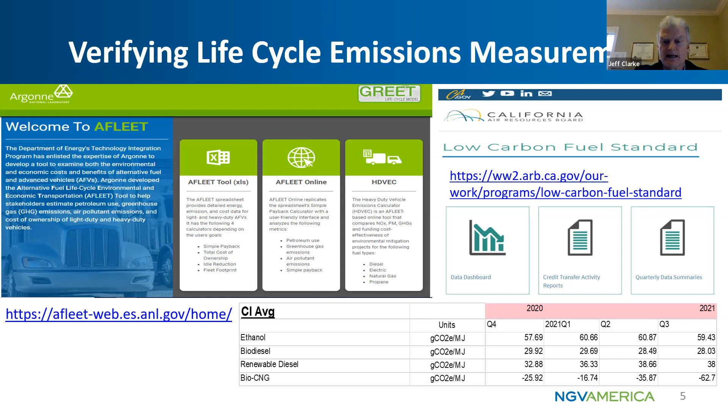Highly recommend these tools. We also point folks to the California website where you can see the carbon intensity scores of different alternative fuels. We're very proud that the bio-CNG number in the bottom right, most recent quarter data, shows it's -62. That's a negative number, so it's carbon negative. Natural gas, bio-CNG, has been carbon negative now for the last 4 quarters of the last year in California. That's quite an achievement.

How important is RNG to our industry? As you can see from this slide and the fact sheet we put in the chat, RNG accounted for 53% of all natural gas used in on-road transportation in 2020 - more than 50%, so that's a huge achievement. RNG, if you look back a few years ago, was just in its infancy in terms of being used in transportation, but it's grown by 267% in the last 5 years.

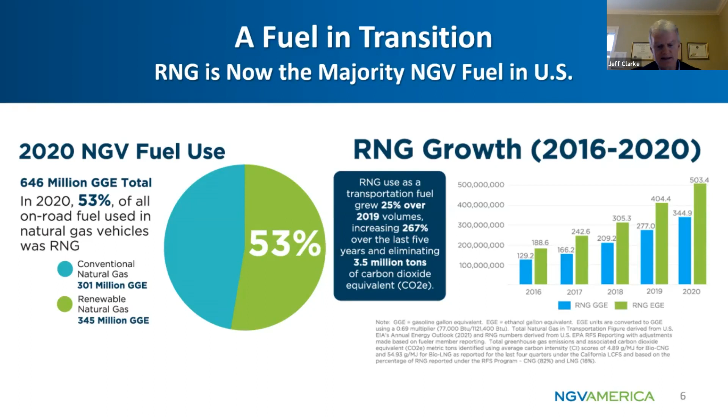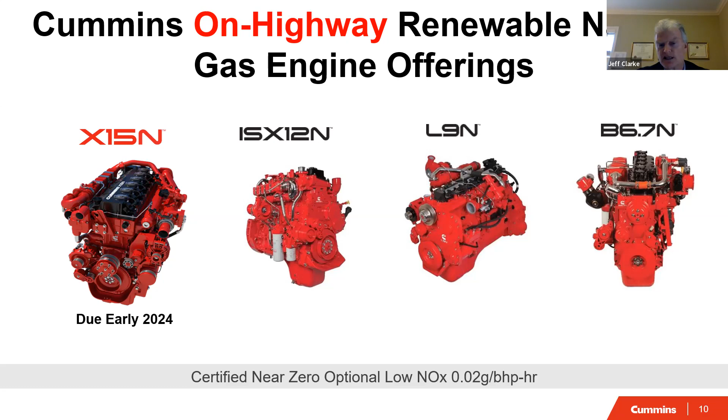What we have is a great solution for medium and heavy duty trucks. Cummins, if you look at their engine, they have a suite of products that can meet all the different applications for medium and heavy duty vehicles. All these engines are certified to the low NOx standard, which is 0.02. That is a standard the US EPA is currently considering adopting as the national standard, but right now it's voluntary, and not likely to go into effect until 2027. So we have product today that running with RNG is carbon neutral, and running with RNG can meet the most demanding NOx standard.

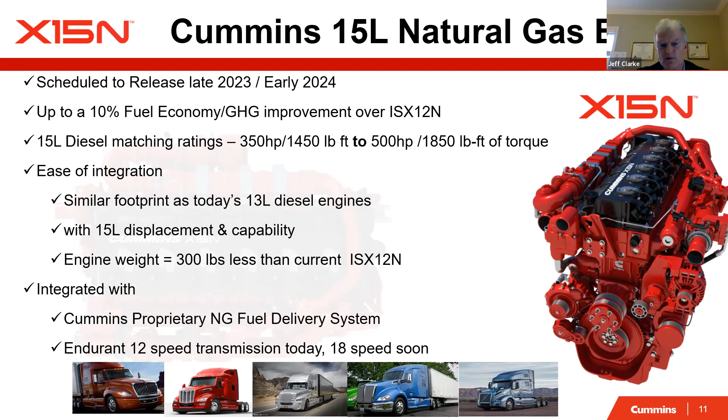Next slide, please. We have a new product coming out in the next couple of years. We're going to see the 15 liter. Why is that important? Because it means we're going to have a large enough engine to pull Class 8 trucks full of 80,000 pounds, operating in the most strenuous conditions. This is something our industry has indicated we need, and now it's coming. This product is going to be in demonstration soon with fleets, and Cummins is saying they're going to have a 10% fuel economy improvement with this engine. So we're very excited about that.

Next slide, please. The benefit of natural gas in transportation is that our engines are able to meet the strenuous emission standard with very simple after treatment control technology, much like what we use in our light duty three-way catalyst. So we do not use SCR systems, so we have no regen downtime. This is essentially a maintenance-free system, no filters to clean or replace, and no DEF fluid.

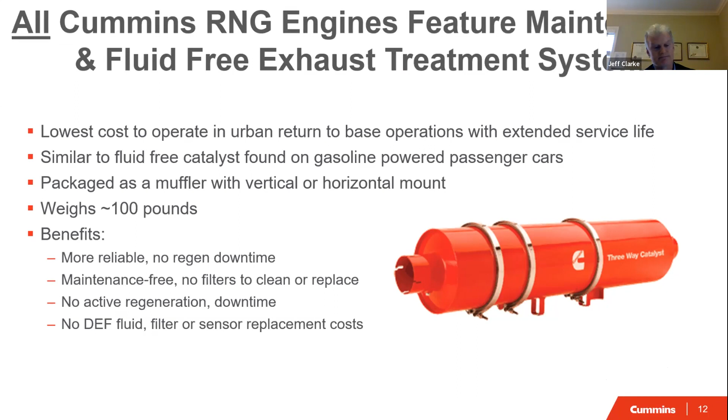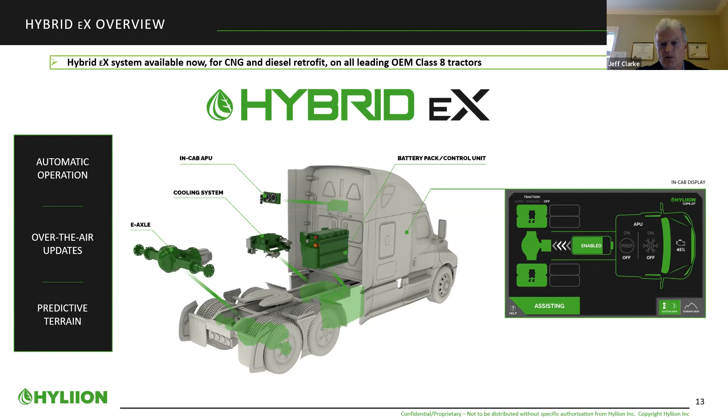Next slide, please. Another great development is the advent of hybrid trucks. This is a product available today in the marketplace as a retrofit. You can take an existing truck and retrofit it with a hybrid system that can run with natural gas and batteries.

Next slide, please. And this is another product available from Hyliion, their Hypertruck ERX, which is coming out soon. This product actually operates as a genset with the natural gas engine providing electricity, and then electricity powering the vehicle. It has an all electric drive capability of 75 miles, which is important in urban areas, port facilities, and other places where you'll want zero tailpipe emissions. It has a 1,000-mile driving range.

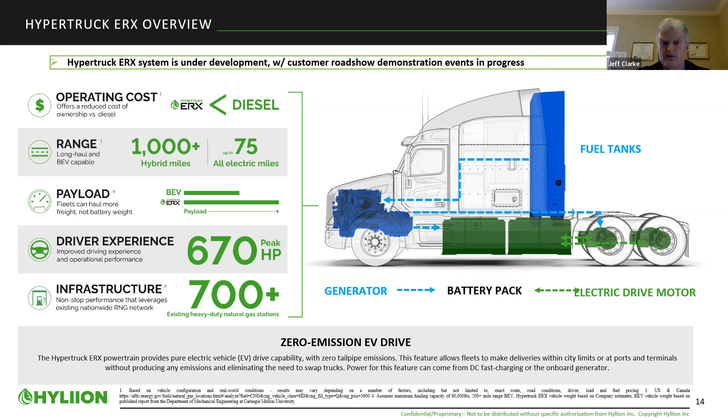Next slide, please. So in wrapping up, I think the takeaways here are that with natural gas and RNG, we have a solution that's available today. It's deployable, it's scalable. We have fuel that's carbon negative, as we pointed out with the Bio-CNG in California. All of our products meet the low NOx standard, and we have trucks that can go 500 miles, 800 miles. So we have a solution that fits a number of different important applications. Thank you very much for your time.

A lot of great information, Jeff. I got a number of questions, but we'll hold our questions to the end. A lot of great information. I hope that people are paying attention and taking notes. Great information. Next, we'll go to Marianne, who is well-versed, with over 100 articles in this space. So thank you, Marianne. Hi, thank you, Antoine. I'm going to turn off my video so that I don't have any bandwidth issues. Okay. Kimberly?

Great. Okay, so we're going to focus today on heavy-duty vehicles, though RNG can be used elsewhere. The focus, as Jeff already keyed us up, is on heavy-duty vehicles. Next slide, please.

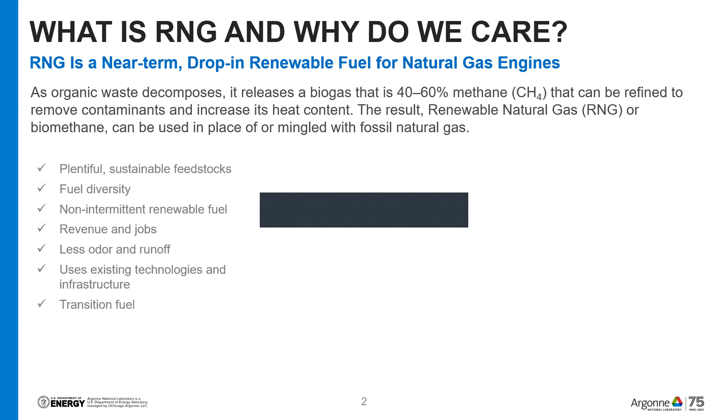Next, please. And as Jeff said, there are a number of benefits, from the fact that it's from renewable feedstocks, it's diverse, it's not intermittent like solar and many other renewable fuels. Economic benefits, it's a transition fuel, and most importantly, next please, it cuts greenhouse gas emissions, and I'm going to really focus more on that particular aspect. Next, please.

This image comes from a document we've recently released, and I'll put the link in the chat in a couple of minutes. It compares various fuels on a well-to-wheel basis, using the carbon intensity measure that California uses, which is grams of CO2 equivalent per megajoule, including both the production and use of the vehicle.

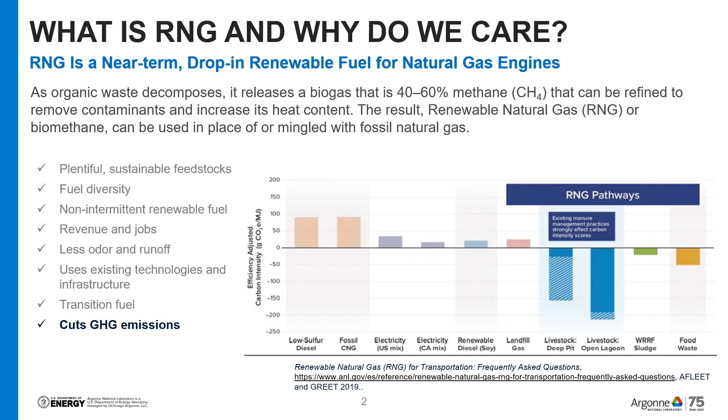These numbers came from the GREET model for generic pathways for each fuel type in a heavy-duty diesel engine, using the AFLEET model to model fuel use on the road. These are generic pathways, not exactly the same as what you'll see from folks in California, where they're reporting actual values obtained from a particular project that produced renewable natural gas for 6 months. Those numbers are specific to a particular project, whereas these are generic.

Walking you through it: low sulfur diesel and fossil CNG, when we adjust for engine efficiency and calculate carbon intensity, are basically equivalent. Electricity is less for the US mix and even less for the California mix. I'm working across from left to right. Renewable diesel from soy is comparable to electricity in California, as is landfill gas. Those are much better than fossil natural gas or low sulfur diesel.

When you move to the right and get into some of these other RNG pathways, that's where you see negative values, particularly for manure-based pathways, where the RNG is produced from animal waste. It could be dairy farms, pig farms, chicken farms, or cattle confined animal feeding operations. It also depends on how the waste was handled in the past, which is why we're showing a range. Those blue lines can be anywhere from well over minus 200 in carbon intensity to just slightly negative.

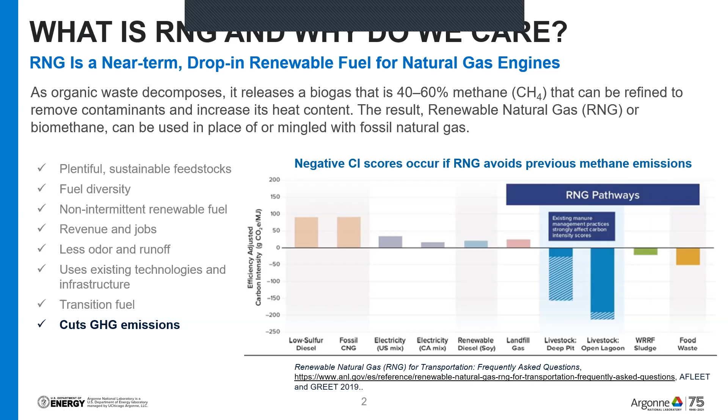Jeff alluded to the fact that we've been monitoring projects that produce renewable natural gas only for transportation. We've been conducting this survey over the last 5 years, starting in 2017, then 2019, 2020, and we've just completed the 2021 update.

These numbers are not yet posted online. I'm hoping they'll be up in the next week or so. Over those 5 years, we've gone from 112 total projects, operational, under construction, or planned, to over 400. That number is a little higher than what Jeff indicated a few minutes ago, because it goes a little further along, through the end of 2021.

That's 418 total projects. For the ones that are operational, they have a potential production of over 600 million gasoline gallon equivalents. That's bigger than what Jeff said earlier, because that's the potential production, what their capacity is.

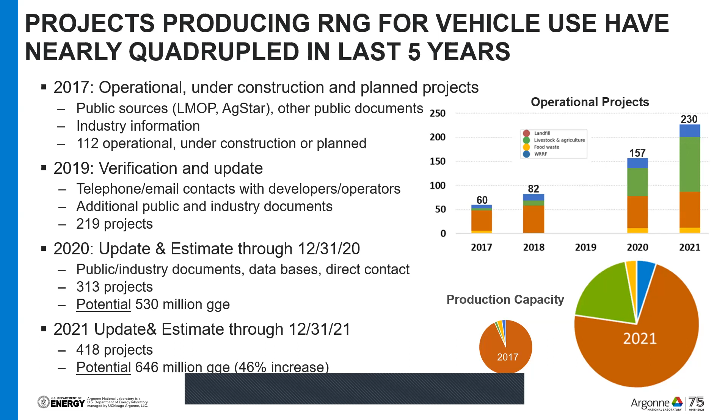In terms of production capacity, following through on the growth in the green bar, you can see how it increased between 2017 and 2021. In 2017, over 85% of the renewable natural gas came from landfills. Last year, it was a little under 75%.

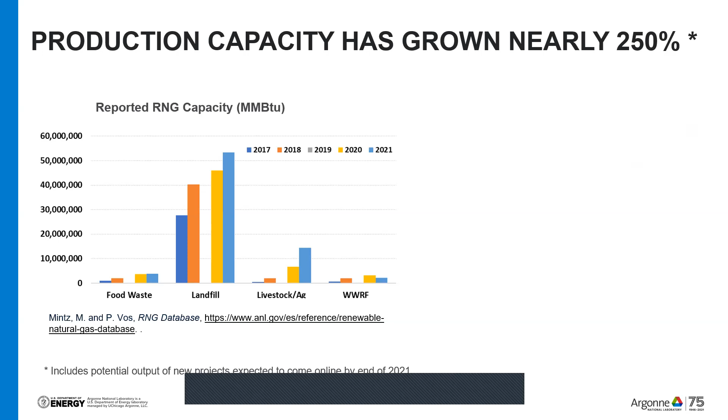Now, the production capacity has grown nearly 250% over that 5-year period. And this is, again, the reported capacity. You can see how it's increased for each of the sources, for landfills, food waste, and livestock, ag, and others. You see that big increase for agriculture. These numbers include the potential output of new projects that were expected to come online by the end of 2021. They were not all in operation when we finished the data collection, but they were far enough along in the process of being commissioned that we concluded they would be online by the end of the year.

The reason for that increased growth is a lot of improvements in the economics. The scale of projects has grown. They tend to be bigger, especially for livestock and ag projects, where they're now clustering several farms together and combining the animal waste into one single digester, which improves the economics for the project.

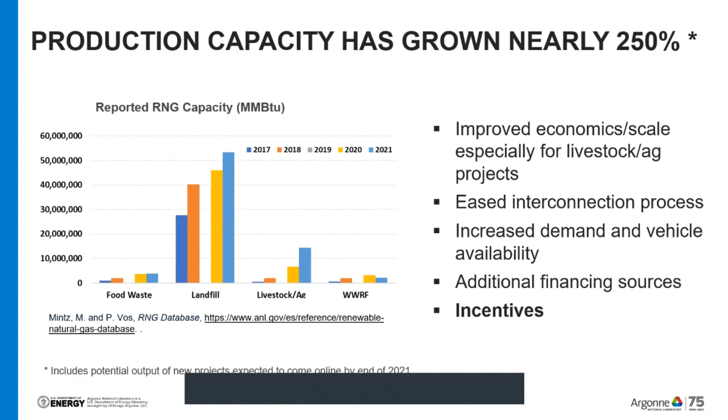There's also been a lot of improvement in the interconnection process for getting that renewable natural gas into the natural gas pipeline network. There's increased demand, as Jeff said. A lot of fleets are now interested in using renewable natural gas, and there's increased numbers of vehicles that can use it. Additional financing sources - I mentioned before that now they're able to get 10-year contracts for some of these projects, so there's a lot more interest, and it's much easier to get these projects financed. They're not cheap. And lastly, a lot of incentives have encouraged the growth of renewable natural gas, and we'll go into that now.

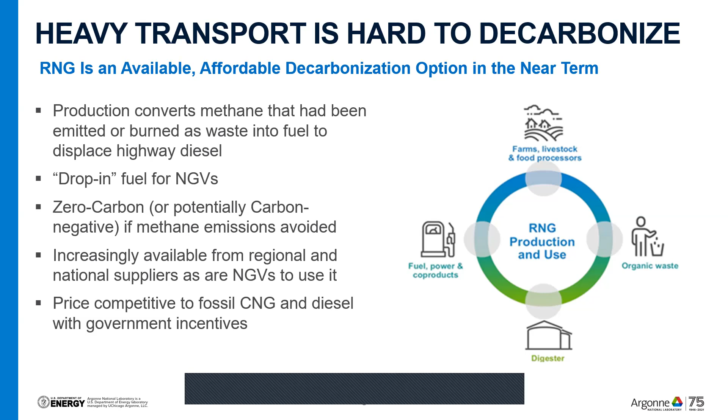As we all know, heavy duty transport is hard to decarbonize, and RNG is an available, affordable decarbonization option in the near term. Jeff went through many of the benefits, and I'll summarize a few: it converts methane that had been emitted or burned as waste into a fuel that can displace highway diesel, which is quite polluting, not only in terms of greenhouse gases, but tailpipe emissions. It's a drop-in fuel for natural gas vehicles, and there are a number of vehicles already on the market and others on the way. It's zero carbon or potentially carbon negative if methane emissions are avoided. It's increasingly available from regional and national suppliers, as are the natural gas vehicles to use it, and it's price competitive to fossil CNG and diesel with various government incentives. And with that, I thank you.

One second, okay. Well, in the meantime, before we begin, that's not mine, but...

There we go. I want to be talking today about WSSC Water's bioenergy project. It's the largest capital project we've ever undertaken. Capital cost is nearing 300 million. I'll spend the next few minutes talking about some of the details and what led up to the project.

The one I'm going to be talking about today specifically is the 5 water resource recovery plants, which Marianne pointed out used to be called wastewater treatment plants before we realized there was a major energy source in the wastewater that could be converted.

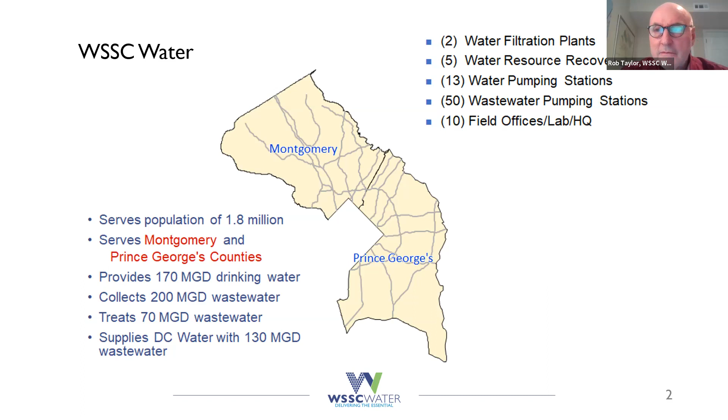The reason for the project is based on biosolids disposal. Biosolids are the solids left over after wastewater treatment. Maryland has instituted stricter state regulations starting in 2016, banning land application in the winter and restricting land application during the fall, plus adding regulatory restrictions for phosphorus. Land application is the main source of disposal for biosolids.

Also, in other states, Pennsylvania, Virginia, and other nearby states are expected to toughen land application regulations due to a growing number of biosolids hauls from Maryland. The long-term outlook is that land application will become more expensive due to longer hauling distances and possible winter storage costs. So that was the initial driver for the project, which turned into a renewable energy project in development.

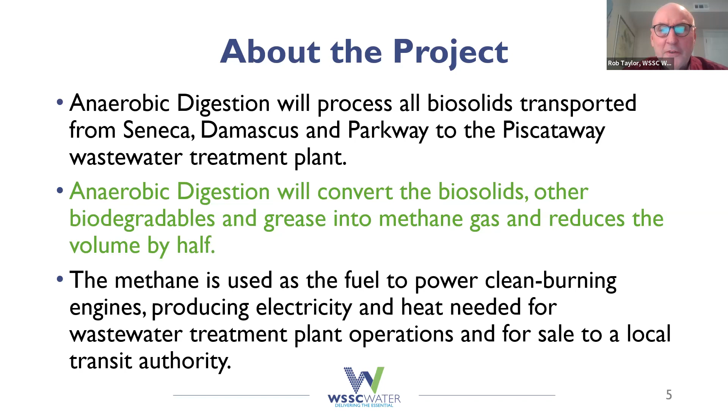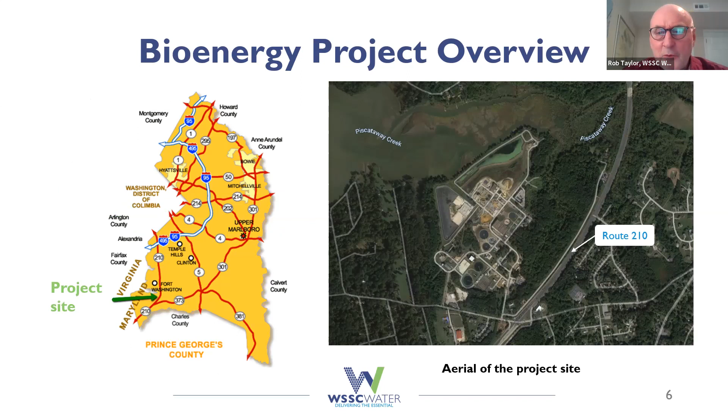This is the aerial view of the existing site, the Piscataway Water Resource Recovery Facility. It processes about 30 million gallons a day of wastewater. It's located in southern Prince George's County, at the corner of Route 210, Indian Head Highway, and Farmington Road.

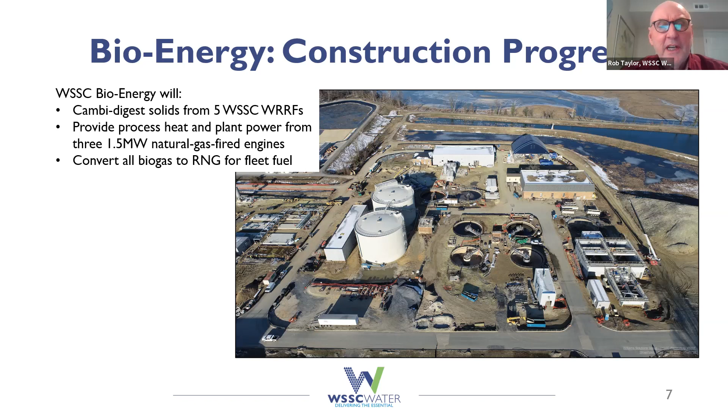The alternate route, if the renewable natural gas market dries up—which we don't anticipate—is that we can always use that renewable natural gas to fuel our engine generators. Going out through meter 2 on the left, it goes through the Washington Gas Pipeline through the city gate and onto the customer.

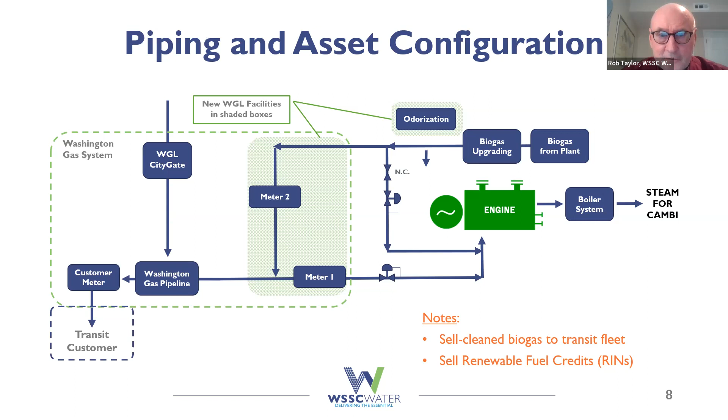We had to spend quite a bit of time negotiating with Washington Gas Light, WGL. As you all know, they're the exclusive natural gas utility for most of the metropolitan DC area, and they're also regulated by the Maryland Public Service Commission. We had to negotiate a contract for the expansion of their pipelines to include the Piscataway bioenergy plant because there was no gas on site, although there were gas lines nearby. We negotiated a price for WGL to run their pipelines and for the use of their infrastructure to convey natural gas to the bioenergy plant, and also convey renewable natural gas away from it to an external customer. This whole process took a few years. It's WGL's first renewable natural gas project, so that's probably why it took so long, but it was finally finished about a year ago.

I won't go through all the items in the contract, but I'll say the renewable natural gas quality specs and sampling specs were quite strict as set by Washington Gas Light. We spent quite a bit of time negotiating with them on the exact specs and sampling specs. The contract was finalized and had to go to the Maryland Public Service Commission last year, and it was approved in November of 2020.

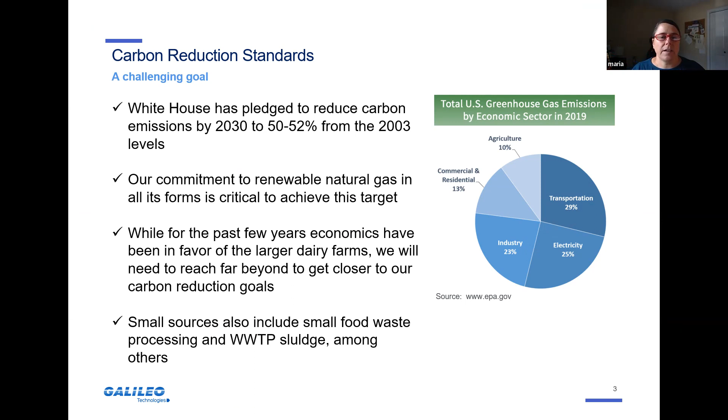The industry has been focused mostly on dairy farms, in the larger dairy farms. And when you look at the amount of large dairy farms, there's about 700 as of 2017.

The other part of this is landfill gas, which is a whole different animal that I'm not going to discuss today. We can discuss it some other day. But the industry has been focused on these large farms because, as Marianne was talking about, there's certain economies of scale that I'm going to talk about in a little bit.

So we think the next challenge will be the small applications. When we talk about small dairy farms, that includes also smaller swine farms, wastewater treatment plants, anything of a smaller scale that has some challenges as far as downscaling the technology, the upgrading technology.

So far, the main challenge to downscale to this smaller farm has been pipeline access. The pipeline interconnection is a very long and very expensive process. I think that is turning a corner, and we're seeing more and more accessibility to different injection points for RNG in the pipeline.

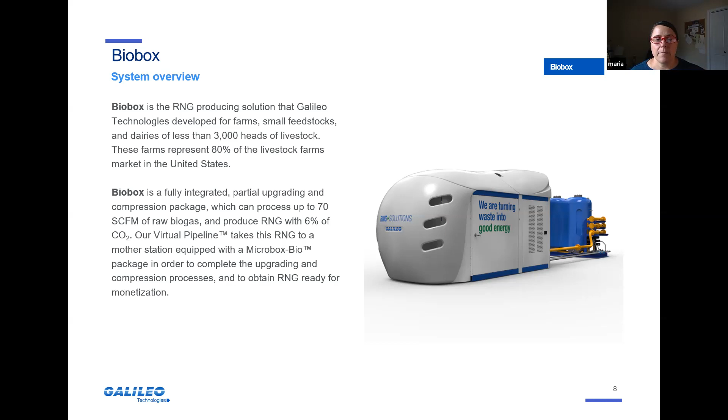So our technology is all plug and play. It comes like that, takes very little space. We can partner up with a digester company if there's not a digester, or a lagoon that we can take the biogas from, and do also a very small digester associated with this.

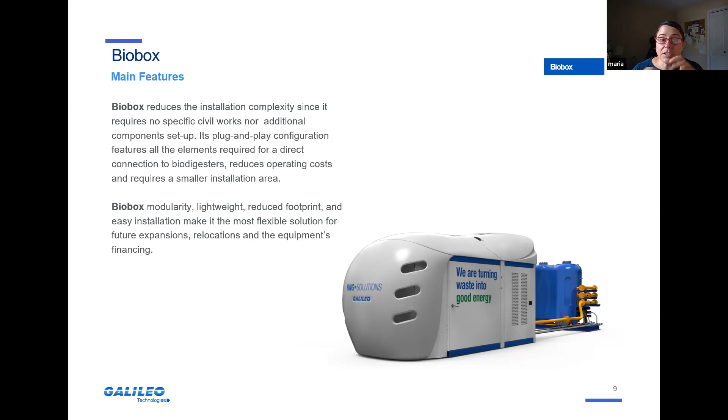This is an overview of how the project would work. We'll have the Biobox on each farm, with the yellow modules representing the virtual pipeline for the CNG, and the Biobox on each farm will partially upgrade the gas. For any kind of farm digester or wastewater treatment plant gas, we would partially upgrade it at the farm, and then we can transport it to a centralized location where we do the final upgrading.

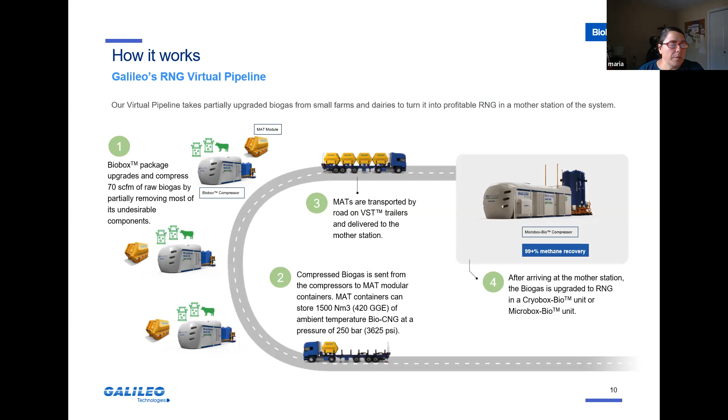These are all about the virtual pipeline, which is the key component. A lot of these farms don't have pipeline injection, and that has limited access to doing biogas at the farm. Basically, a lot of farmers with big farms, or who can concentrate several farms in an area, or big wastewater treatment plants, have been getting royalties and benefiting from the biogas economy. We think there's a lot to be done regionally, bringing this to each community in the country, bringing the ability for the small farmer to also benefit from that.

As Jeff mentioned, there's biogas everywhere you look, regionally. Every community has biogas, and our goal is to make sure they can upgrade it and use it. This is our smaller unit, but we have a whole range of products that will allow them, in a very modular way, to exercise the ability to upgrade and use that gas.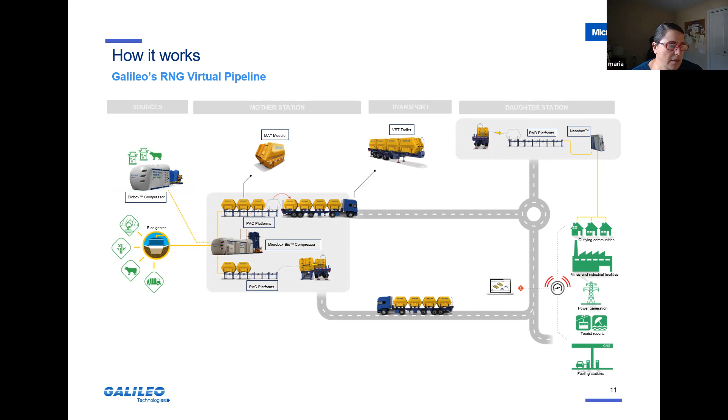This is about the virtual pipeline and how our modular virtual pipeline will allow for this too. The two biggest costs you have when doing an upgrade project from any kind of digester or farm would be electricity first, and second would be transportation of the gas to an injection point. So we try to minimize those two with a more creative way to handle the virtual pipeline with our modules.

As far as power consumption, the fact that we have our own compressor technology allows us to integrate the compressor with the upgrading membranes. We use a 3-stage membrane system, which allows us to integrate the compressor with the membrane so we can reduce power consumption too.

That way, projects that could not have been economically viable before, because of the cost of constructing a whole upgrading system, now with this system that has very little construction on site, everything comes pre-assembled, you just drop it, connect it, and you're good to go. This allows smaller farms or smaller applications to have access to a technology that has been available for larger farms for a long time.

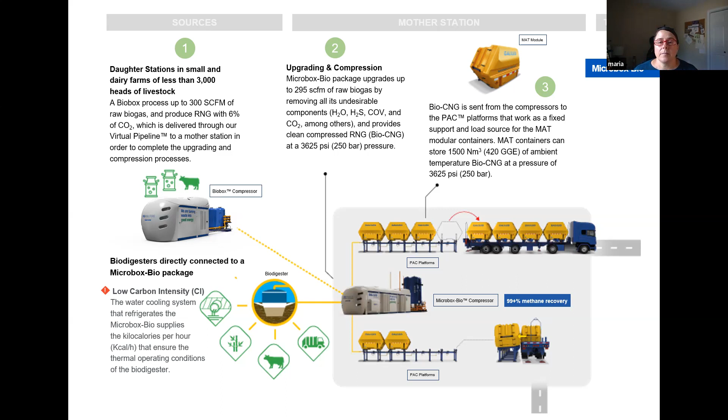I have a few more slides on the virtual pipeline. Let's move to the next one.

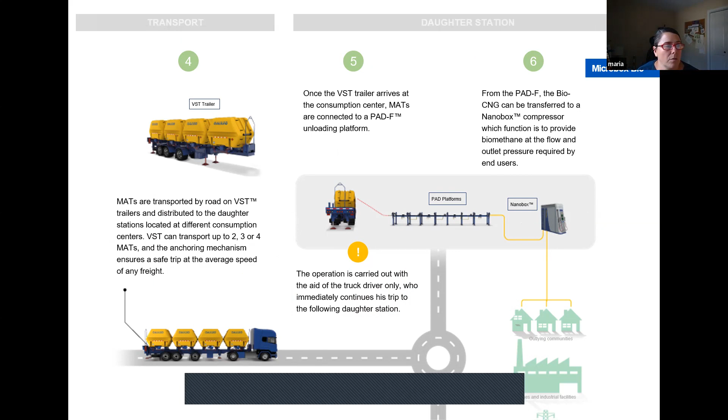The gas, once it's been upgraded, can be used for power generation, for vehicles, for industrial facilities, communities—any kind of use. Depending on where the gas comes from, whether it's a dairy farm, a swine farm, or a wastewater treatment plant, like Marianne said, it'll have a negative carbon footprint or a neutral carbon footprint.

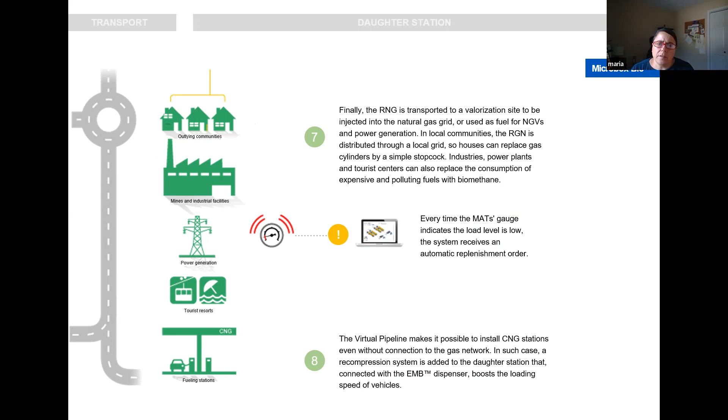I have a couple more showing the virtual pipeline details. If we can move to the next one. The virtual pipeline modules can just be moved from the trailer to the platform where they sit while loading from the upgrading unit, the Biobox, very easily. You don't need a crane, you don't need anything—it's all hydraulic to move that.

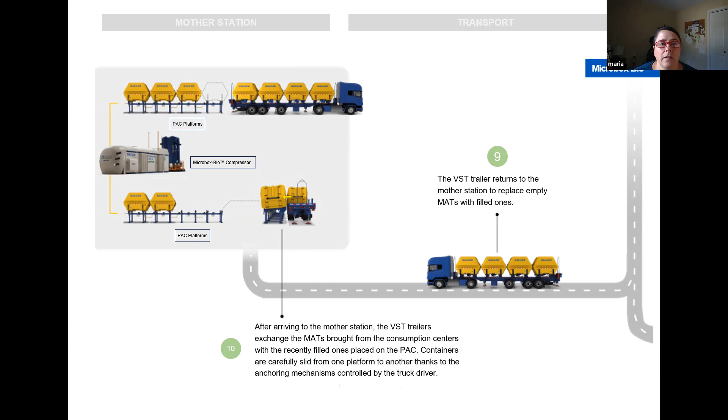And the next one—it requires a very, very small footprint for the upgrading system. Then we'll have the digester, which depends on the amount of waste we have, but this will also have a very small footprint. We have 2 units with a Microbox, our next size up, in Wisconsin. It's a very compact, integrated system with only 1 compressor, everything integrated with the compressor. It's really very efficient.

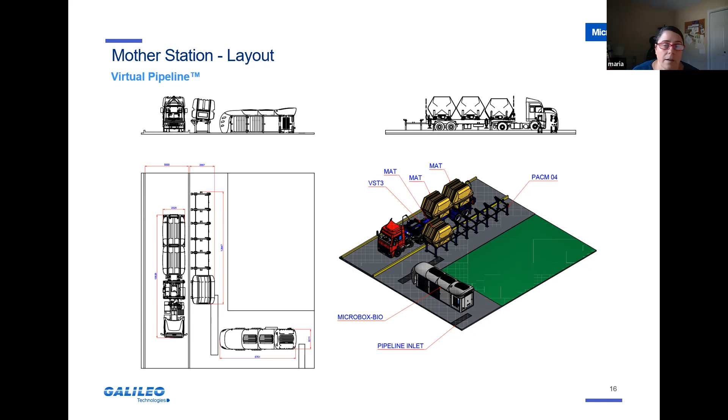I think the most groundbreaking thing about this is that it'll allow small farmers and small applications that have not been participating in the biogas economics—which is what larger farms and larger applications have been doing—to do that now. That will exponentially increase the amount of biogas available in the country, which will help us reach our carbon reduction goals. I think that's about it.